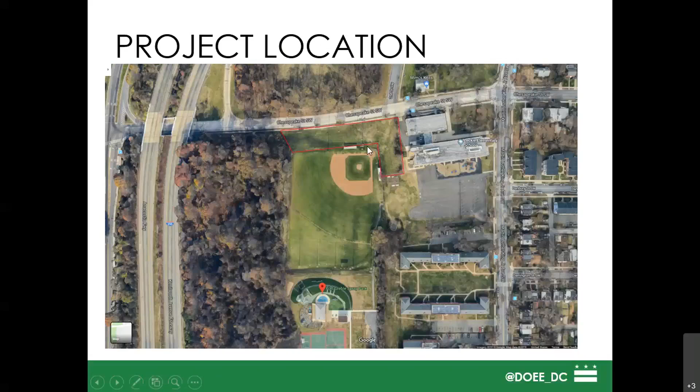So a little red outline shows you where the focus of our project is, and I apologize, but actually we won't be focusing on the entire hillside, but just the parcel directly adjacent to the elementary school.

Okay, a little bit of background about stormwater and stormwater management and why we do what we do.

Prior to land development, the surface of the earth was covered with lots of vegetation and good thick soils that acted like a sponge, with very few, if any, hardscapes. What that meant was when rain would fall onto the earth's surface, we would have a lot of different ways for that rain to be managed.

Some of it was utilized by the existing vegetation through canopy interception. Sometimes that rainfall was returned to the atmosphere by the vegetation in the form of evapotranspiration. Some of the water infiltrated or soaked into those really good soils and was held by the soils and returned through subsurface flow to our streams and rivers, while other water would be infiltrated much deeper and returned to our streams and rivers in different mechanisms.

And some of the water would run off of the land, and that's what we call surface runoff. You can see in the schematic on the left that looks at pre-development, and the blue arrows, which indicate the different amounts of those different features.

On the right-hand side of the screen, you can see what happened after we developed the land. So what's the first thing we do? We cut down all the vegetation, we grade and compact those really good soils so that they lose their sponge-like quality, and we erect lots of hardscape surfaces that do not allow for water to soak into them.

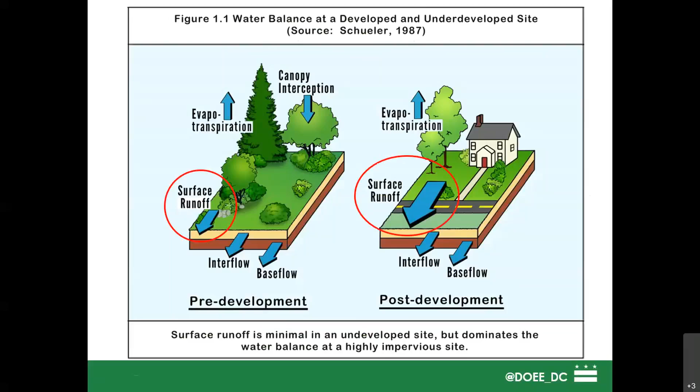So what? This is the so-what factor. Why do we care that we have more stormwater pollution, more stormwater runoff?

In the business, we like to say that the problem of stormwater is that it is hot, fast, and dirty. Anybody who's seen a parking lot in the summertime can see the heat coming off the parking lot. When a storm comes through and drops a bunch of rain on that parking lot, it picks up that additional temperature, or what we call thermal pollution. And the water is returned to our streams very quickly and very hot, which is not good for our aquatic friends. The water is fast, it's coming off the land.

Stormwater is returned to our streams and rivers through outfalls. What that means is in the upper right-hand part of your screen, you should be able to see these pipes that empty into our streams. Those outfalls are typically placed at the same level as the stream bed.

So in the picture on the left with my colleague, you can see that the outfall that's returning the stormwater is a good 10 feet over the stream bed. Now, when that happens, those erosive forces will cause more sediment from the stream banks to go downstream. So again, hot, fast, and dirty.

You can actually see in the picture on the right, the water coming out of the outfall that's very murky with all the sediment that it's carrying.

And then finally, dirty. Anything that is on the land will be picked up by stormwater runoff because there is no treatment to this water before it gets back into the streams and rivers. So that's things like heavy metals, oils, grease, dog waste, trash, as you can see in the lower right hand picture. All of this stuff comes into the streams and rivers from stormwater runoff.

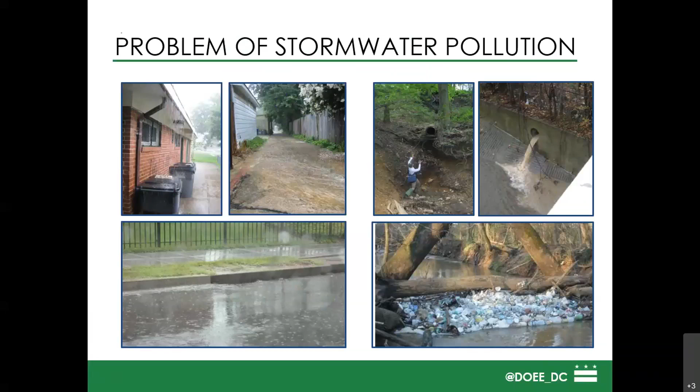Oftentimes we like to say that stormwater is really a problem of imperviousness. But as we are seeing more and more in the field, even compacted open space or pervious land can also contribute to stormwater runoff volumes.

If we think about stormwater being a function of imperviousness, let's take a look at that for a moment. We know that in the district, our total area is 68.3 square miles. And of that, 61.3 is land area, the rest being rivers and streams. The imperviousness is approximately 43% of that land area, which is a large number.

This means that in a single 1.2-inch storm event, we are producing 525 million gallons of stormwater runoff. Again, that's one storm event, and that's the amount of runoff that we're trying to capture and deal with. The 1.2-inch storm event is an important one because the majority of storms in the district are 1.2 inches or less on an annual basis.

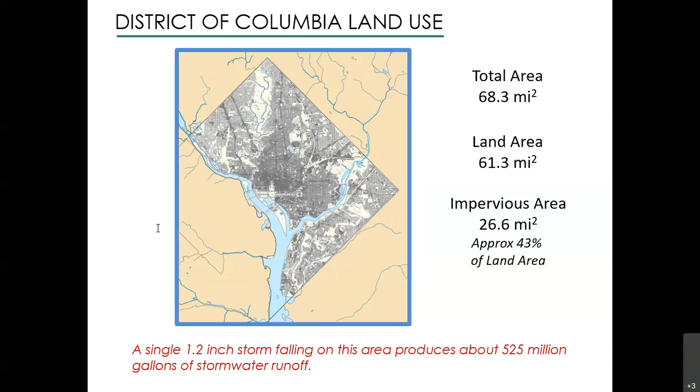So again, 1.2 inches will generate 525 million gallons of stormwater runoff, but that's just one storm. That's not even considering all the other storm events that are happening in the year. So that's really the issue that we're trying to deal with.

So if we go back to that picture a few slides back where we saw the water coming out of the outfall, out of the pipe into the stream, that means water lands on the ground, goes into a drain, into a pipe, and goes straight into our streams and rivers without any treatment in between. That's where DOEE focuses our efforts.

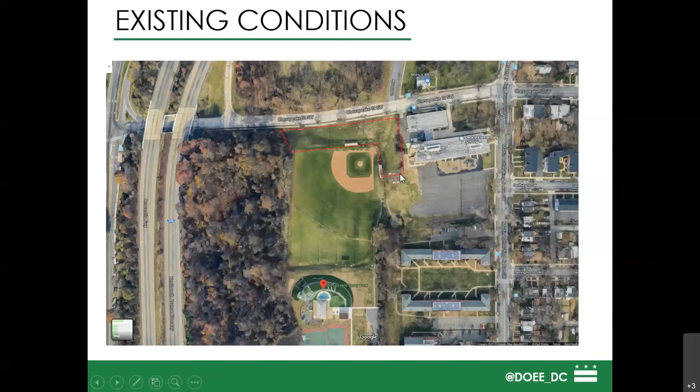Currently, stormwater drains from the athletic field towards Chesapeake Street Southwest, going north. There are some standing water issues at Leckie Elementary School, so we were able to include those in this project to address that issue for the school. Because of the open space and the adjacent use by both the students at the school and folks in the parkland, this provides a good opportunity for ecological restoration while developing a community amenity.

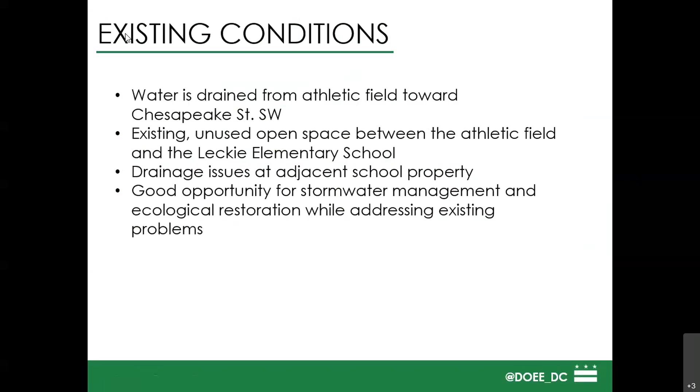So what are our objectives with this project? What are we hoping to do? We want to treat as much stormwater as possible through these projects in the most cost-effective way, with the budget we have. Because of the funding source for this particular project, I can only work on district land. We want to make sure we have minimal impacts to the community, and, whenever possible, develop a community amenity. And of course, provide educational opportunities around stormwater management and ecological restoration.

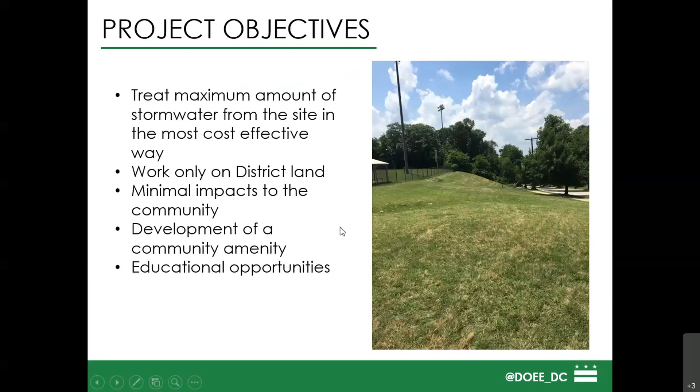Let's take a look at the approach we're going to use at this site. Very briefly, how do we manage stormwater? How do we clean it up, slow it down, and cool it off before it gets to our streams and rivers? Most stormwater management practices behave in the same way. They work to mimic the natural processes that existed prior to land development. We want to add vegetation, let that vegetation work its magic, and improve the soils so the water can soak in and slowly return to our streams and rivers. So the saying is: slow it down, spread it out, and soak it in.

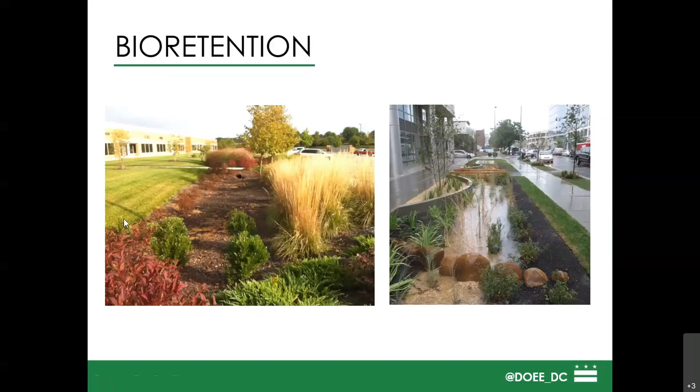One of the most common ways to do this in the district is a technique called bioretention, and we'll go over how bioretention works in a moment. On the left of your screen is an example of a bioretention application in a more suburban environment. You've got the building on the left, a managed turf area in between, and a parking lot on the right. This bioretention captures the stormwater coming off that parking lot and treats it before returning it to the surrounding streams and rivers. The photo on the right is a practice in DC, in NoMa, in front of our offices. This bioretention functions in a very similar way, capturing the stormwater coming off of First Street and bringing it into the bioretention, where it has the opportunity to pond and then slowly filter through the engineered filter media. I'm going to show you what that looks like next.

Here's how bioretention works. These projects are a depression, as we saw in that last picture—they are below grade. Water comes into the system where it will pond temporarily, and then it will slowly filter through the engineered filter media, like I mentioned a moment ago. The ponding will draw down quicker than the water in the filter media.

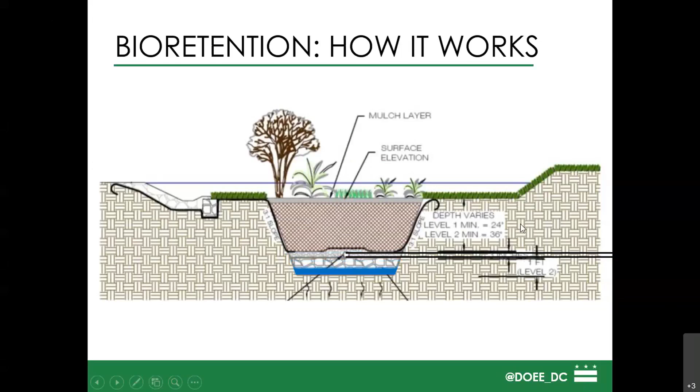The filter media is 85% sand, so it has really good infiltration and water moves through it pretty quickly. But it's there long enough to allow for the removal of some of those pollutants as well as reduction of overall stormwater volumes. Depending on the technique or design utilized, water can either infiltrate into the existing surrounding soils or go out through a perforated under drain pipe tied back into the storm sewer system. And that's how the bioretention functions.

That is the technique we're utilizing at this particular site. Here it's called a dry swale, but it's just a different term for the same kind of practice. You can see from the schematic, on the upper part is Chesapeake Street, on the right-hand side we've got Locke Elementary School, and over here we've got the existing ball field. So we are capturing stormwater a little bit from the school property and from the surrounding area, putting it into the bioretention, in two bioretentions, where it's daylighted or returned to the hillside.

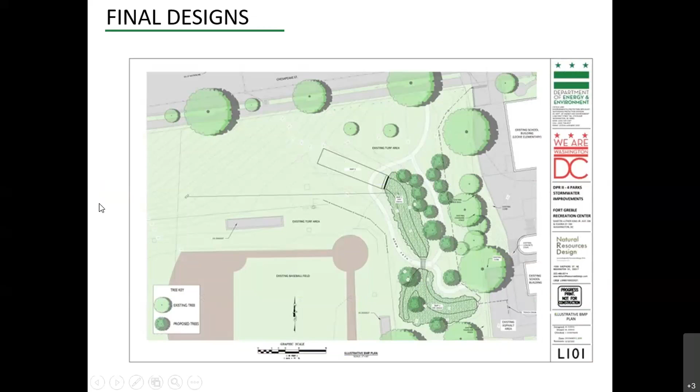These systems are vegetated systems. The vegetation is actually responsible for doing a lot of the heavy lifting with these practices. They are called bioretention for a reason. So we want to make sure that when we are planting these practices we're utilizing native vegetation that can endure both being inundated or flooded with water during a storm event. And since we're using really sandy soils, we want to make sure the vegetation can handle drier conditions.

In addition, I believe it was the vision of the contractor who won this contract to create a reforestation of the area, if you will, to better connect the outdoor classroom that is directly to the south of the site and provide a learning opportunity for the children who use this area.

Lauren, is there anything else you'd like to say about the vegetation while we're on this slide? I think it might be noted that some of the vegetation will provide wildlife habitat and will have berries on it that are edible for both wildlife and children if they so please. And there is a path designed in this plan as well, which enables folks to walk around the bioretention areas so that students from Locke or community members can learn more about how bioretention cells work.

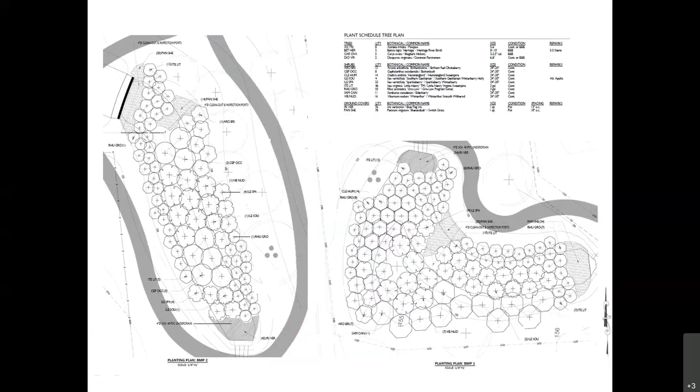Just a little bit more details about those planting plans. It just sort of shows, and if you're interested, everything is on the project website, which I can also share in the chat box - our fully permitted design plans, as well as the design report, and past presentations from previous public meetings. But we wanted to give a little more detail regarding the planting because we find that's a topic a lot of community members tend to be interested in.

So let's get into the project timeline next. This project was contracted in May of last year. We have had some delays due to the pandemic, but I'm sure everyone has. From May to August of last year, we did field assessments, investigations, looking at how water runs across the land, what the soils are doing, where the existing trees are, and so forth. Then between August and January of this past year, we did design development. As I mentioned, there was some delay as a result of the pandemic. So we had our initial concept design meeting in September of 2019, our semifinal design meeting in December of last year, and now here we are having our final design or construction kickoff public meeting.

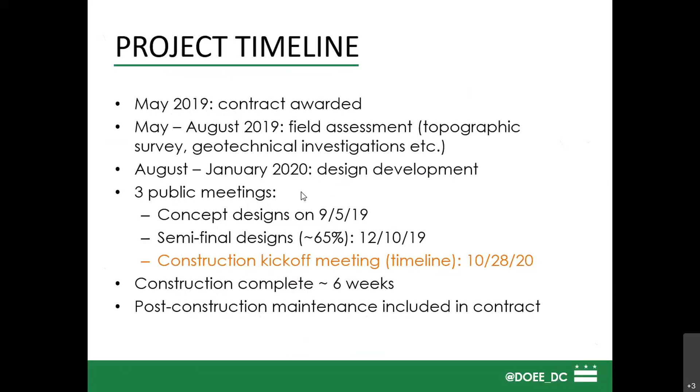We estimate construction will take about 6 weeks to complete, but that's a conservative estimate. With any construction project, the timeline is a function of how much rain we get, as well as any underground issues we happen upon, although we don't expect to have any underground unknowns for this particular site. There is some post-construction maintenance included in this project under the existing contract, so the firm doing the design and construction will be helping with maintenance for a while.

All right, now let's see some construction details so you can see what this looks like.

So just some interesting things to keep in mind. All work will occur during the week, Mondays through Fridays. Work hours are 8 a.m. to 5 p.m. You can sometimes see folks queuing up before 8 a.m., but no heavy equipment will be turned on until 8 a.m. If we run into a time situation, we may request from DPR that we're able to work on Saturdays or start earlier, but we would give advance notice for that.

The kind of vehicles that you can expect to see on the site are listed here: one skid steer loader, one track excavator, a stake body truck, and one crew pickup truck. I believe the majority of the equipment will be stored on the site proper, however the crew pickup truck may be parked on the roadway. Is that right? That's correct.

We're probably also going to have, you can see in the image that there's an excavator there with a dump truck. So when we're reusing a lot of the soil on site, we will be excavating some soils off site. So there'll be a dump truck that will on occasion come in to take soils out. Thank you for that.

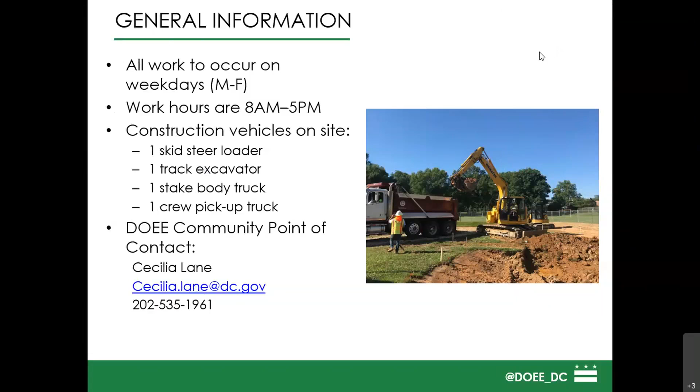All right, this schematic shows you what the construction zone will look like during construction. You can see the area in the middle that's in yellow is the construction zone that will have security fencing around it. There will be no public access through that area while we are working. On the left-hand side where there's a big orange rectangle, that's where equipment will be stored as well. Again, no public access to that area.

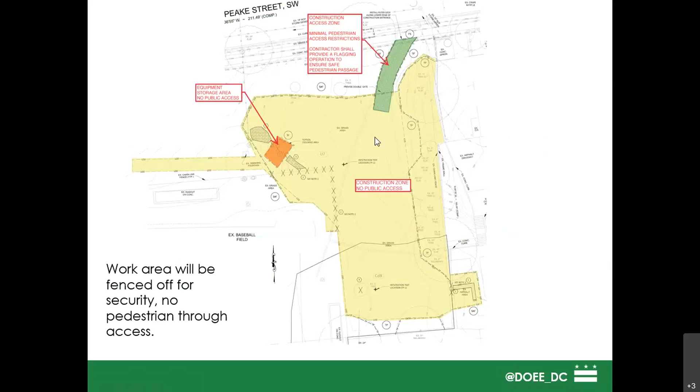Okay, so some frequently asked questions that we get when having these meetings: how do we find our projects? Enthusiastic landowners is number one. DOEE doesn't own any land as an agency, so we need to work with our sister agencies to find opportunities for stormwater management and ecological restoration around the district. That's both our sister agencies in the district, but also our federal partners.

We love working with DPR. They're a great partner, as well as they have their own sustainability objectives in their comprehensive plans as they're moving forward. Sometimes our funding sources dictate where we can and or cannot work. As I mentioned earlier, with this particular project, the funding source requires that we work only on district land. But in other situations, sometimes we're able to find funding for federal work.

Again, impervious cover - as I mentioned earlier, when we think of stormwater, we think of it as being a problem of imperviousness. And while that is mostly true, there's a little bit of contribution from compacted turf area in the district. We do target our efforts on large areas of untreated impervious cover. Much of the stormwater management that goes in the ground in the district is driven by regulations, and new development or development projects trigger those. We will find large areas that have no plans for future renovation anytime soon, and those are really great opportunities for us to come in and provide stormwater management on the site.

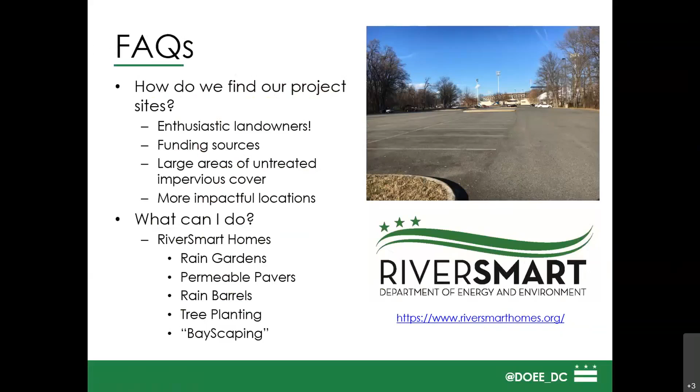And with that, that is all I have to share with the group regarding this particular project. But we do have plenty of time, and I am happy to answer any questions that you may have about this project.

Cornelia Harris, one of our participants, says that she has participated in the RiverSmart program, and that's great news.